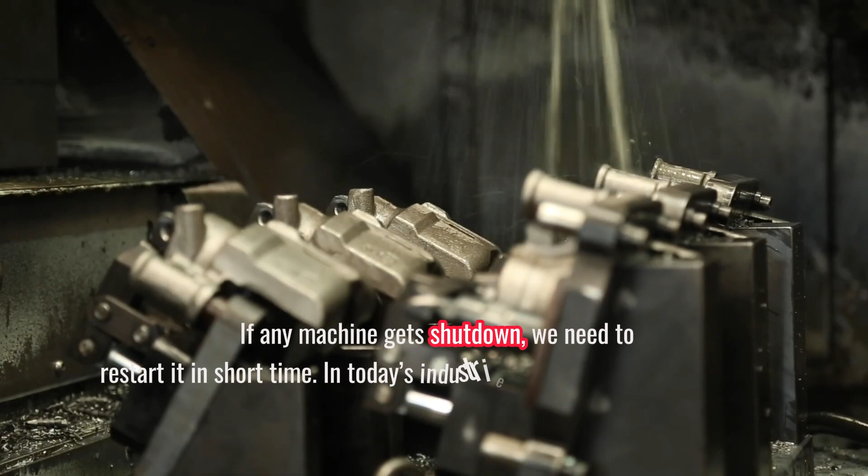Being an engineer or technician, our major role in industry is to keep the system running without fail. If any machine gets shut down, we need to restart it in a short time. In today's industries, where production rates and product demand are very high, machines should not get shut down. If it is shut down, then it should be restarted very fast.

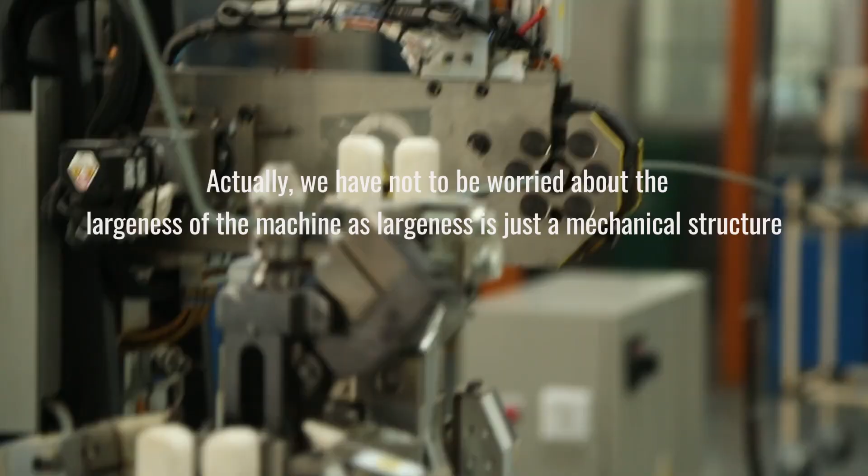Now our first problem is where to start finding the problem in a machine which is very large in size and spread over a large area. Actually, we need not worry about the largeness of the machine, as largeness is just a mechanical structure. Often, we don't get any problem in the structure once the machine's running trial is checked off. So we have to concentrate on three parts, i.e. input, controller, output. These three parts of the machine are the important parts in terms of finding problems.

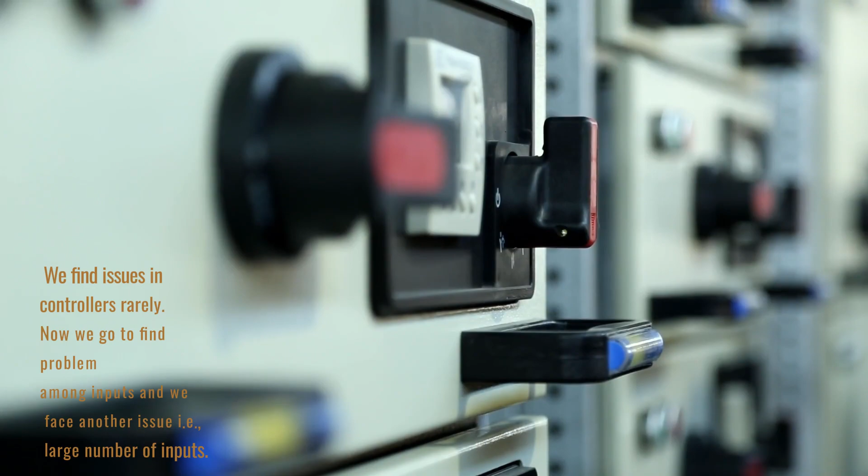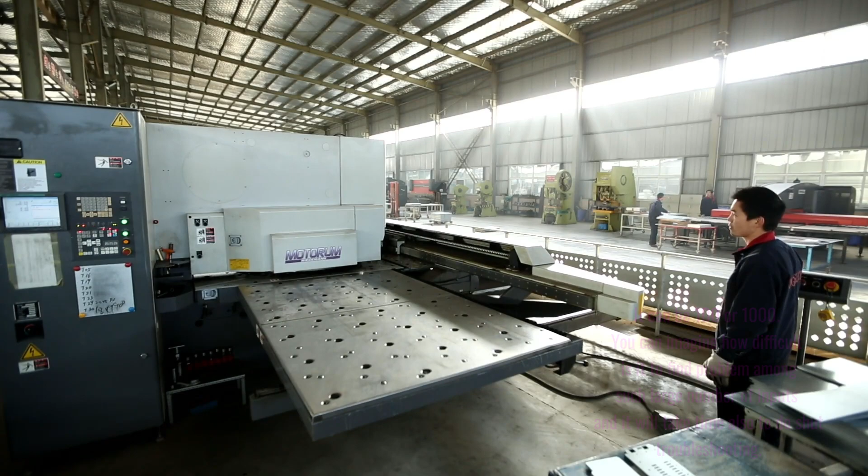Most of the time, machines are shut down because of input and output issues. We find issues in controllers rarely. Now we go to find the problem in inputs, and we face another issue, i.e. a large number of inputs. It can be 100 or 1000. You can imagine how difficult it is to find a problem among such a large number of inputs, and it will take time to do troubleshooting. The same problem we face among outputs. If we have an advanced controller with advanced featured software, we can find the problem in 5 to 10 minutes. We shall have a discussion about controllers.

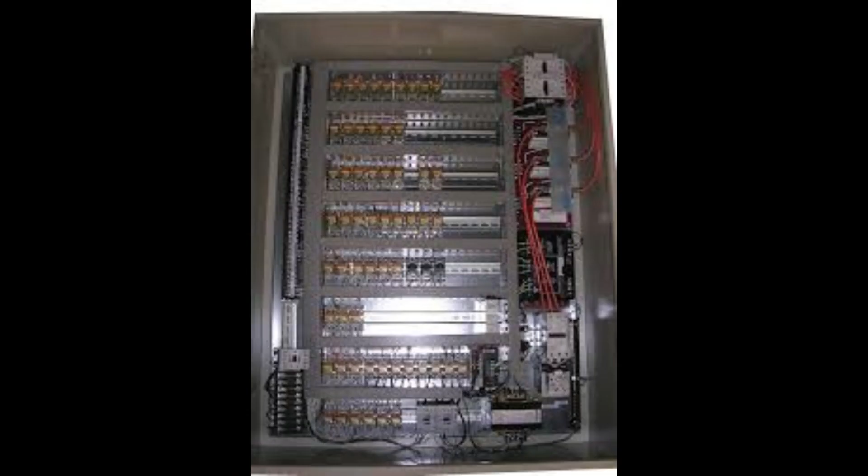A controller monitors and controls any machine system. Initially, when industry started, it was all manual operation. Manual means a man was the controller. It was a man, an operator, who used to monitor the system, and he was taking decisions of operation too. This manual system was not accurate and was very time-consuming. The very first automatic controller that came in industry was the relay logic controller.

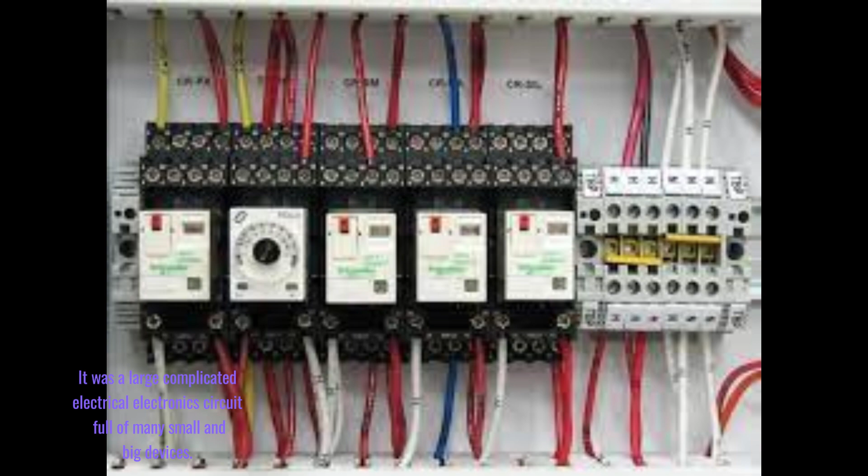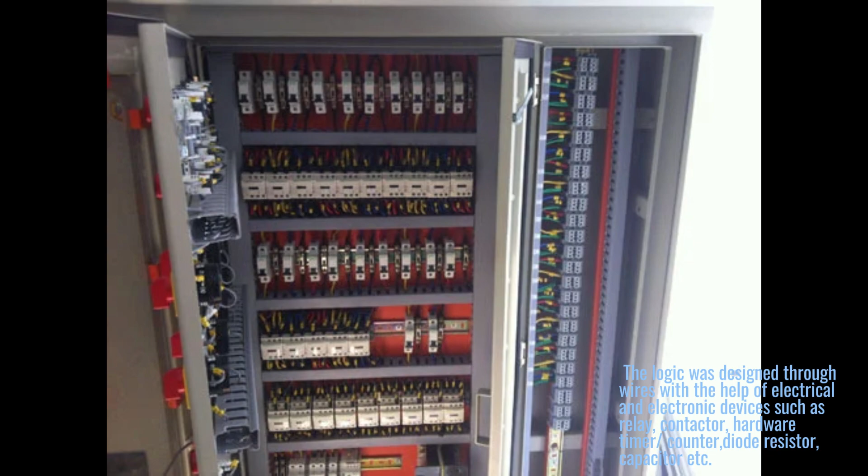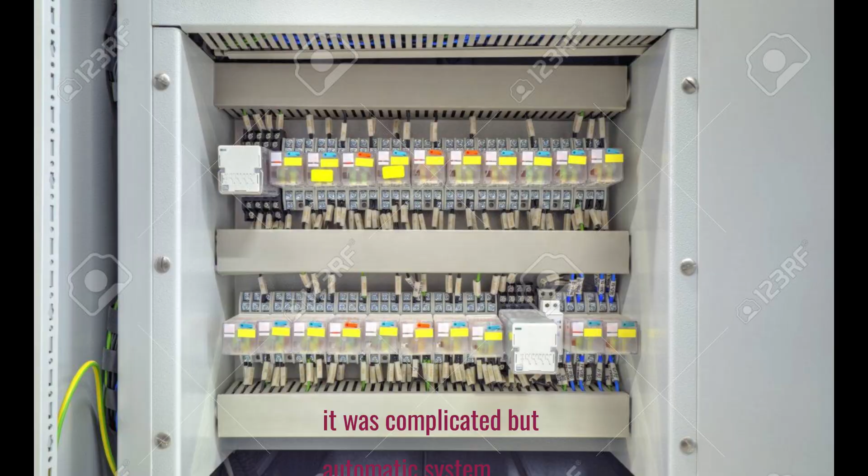It was a large complicated electronic circuit, full of many small and big devices. The logic was designed through wires with the help of electrical and electronic devices such as relay, contactor, hardware timer, counter, diode, resistor, capacitor, etc. It was complicated but an automatic system. This relay logic can be seen in some old industries. Railways also use relay logic control. Now it is being replaced with advanced controllers.

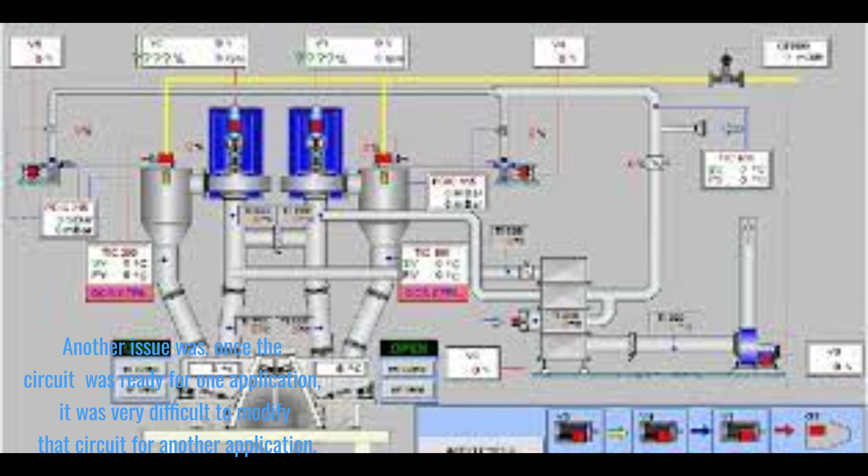It was a good controller, but obviously it has some limitations. Once it was shut down, it was so difficult to find the problem in that large complicated circuit, as there was no monitoring system at that time. Another issue was, once the circuit was ready for one application, it was very difficult to modify that circuit for another application. In fact, even small modification was difficult.

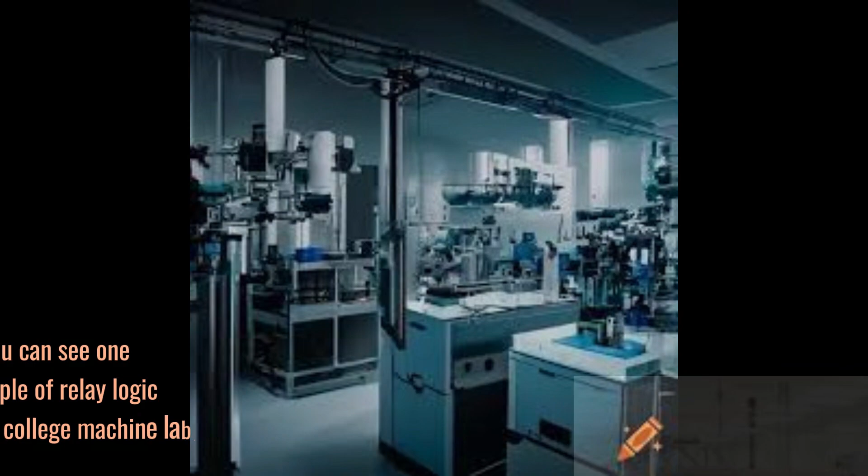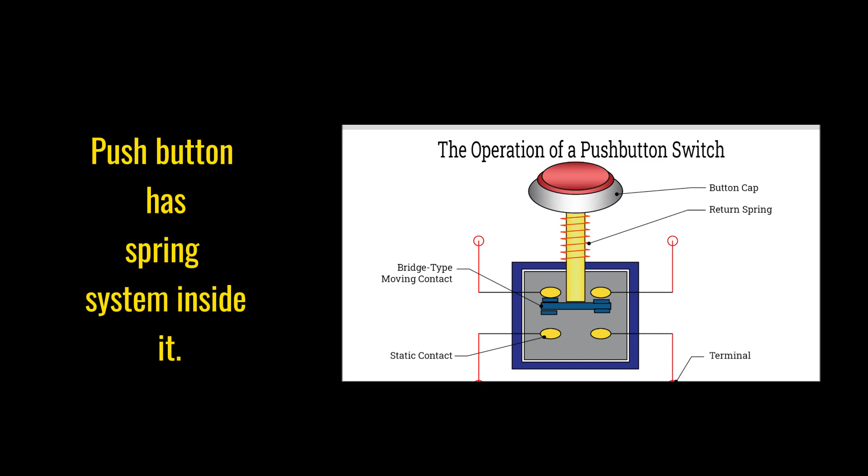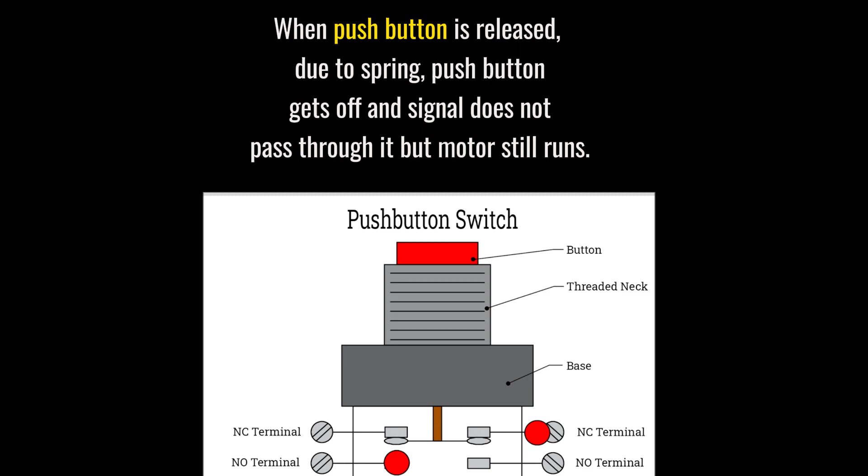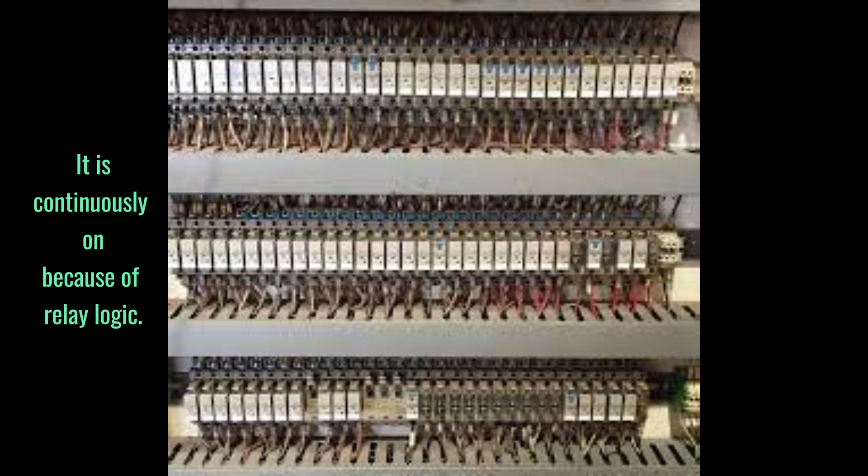You can see one example of relay logic control in the college machine lab. The motor is turned on and off by two push buttons, generally green and red colored. A push button has a spring system inside it. When the push button is pressed, it conducts and supply reaches the motor. When the push button is released, due to the spring, the push button gets off and the signal does not pass through it, but the motor still runs. How? There is no microcontroller that you can see. It is continuously on because of relay logic. The motor is latched by a relay.

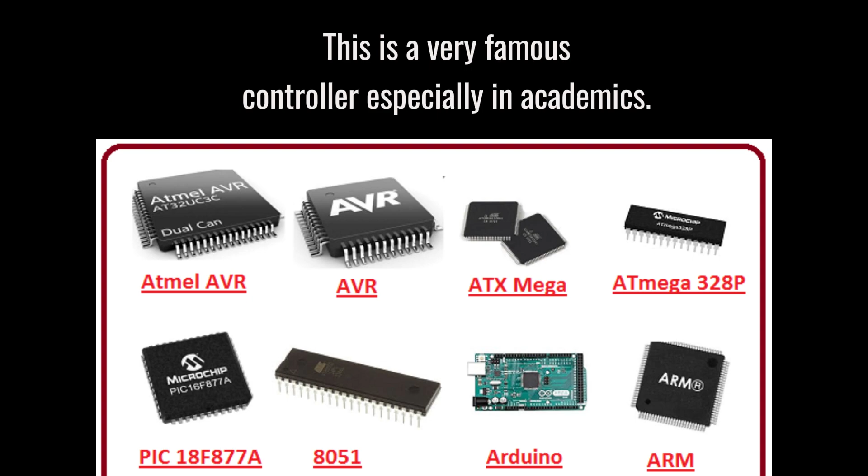Another very famous controller was the microcontroller. This is a very famous controller, especially in academics. It is a very good controller as it is very compact in size, very cheap in cost, and the best part, programmable. If you are able to program your controller, you can make modifications in your existing system as per requirement, but still it is not used in industries to control machines, and this is the reality.

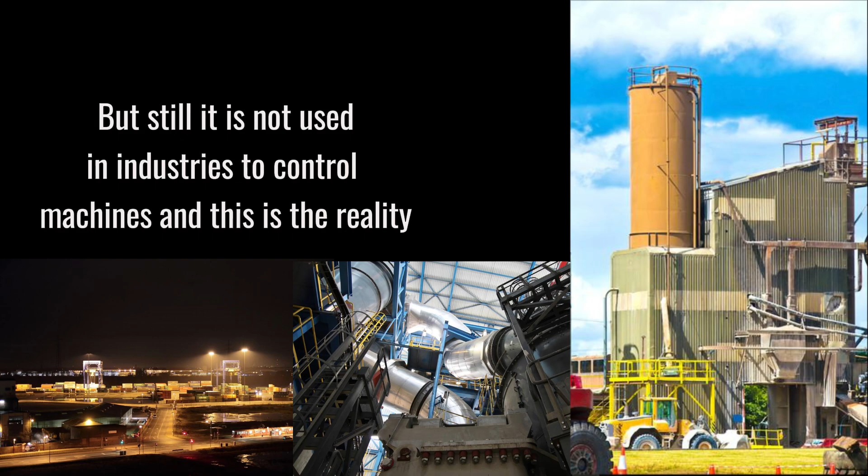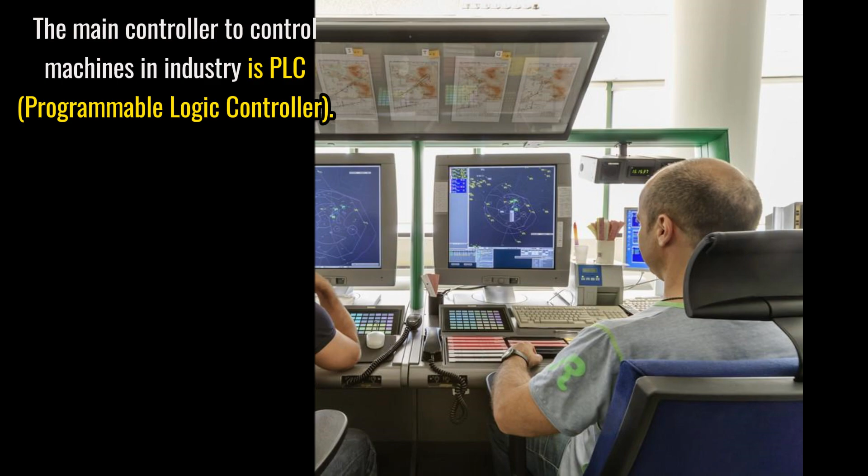The microcontroller is a very good controller, but it has some limitations, because of which it is not the main controller in manufacturing industries. The main controller to control machines in industry is the PLC, Programmable Logic Controller. It originated in 1968 in the automotive industry in the USA, on the proposal request of Hydramatic General Motors, for replacement of the relay logic control system. This proposal was written by Edward R. Clark. The selected proposal came from Bedford Associates.

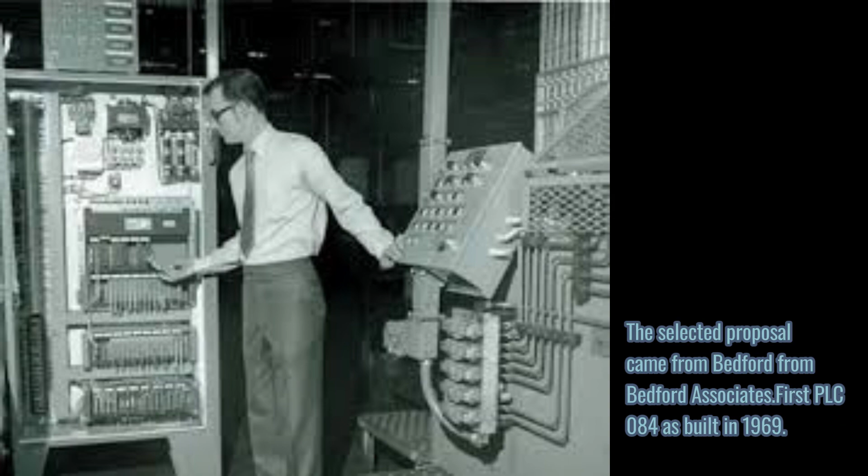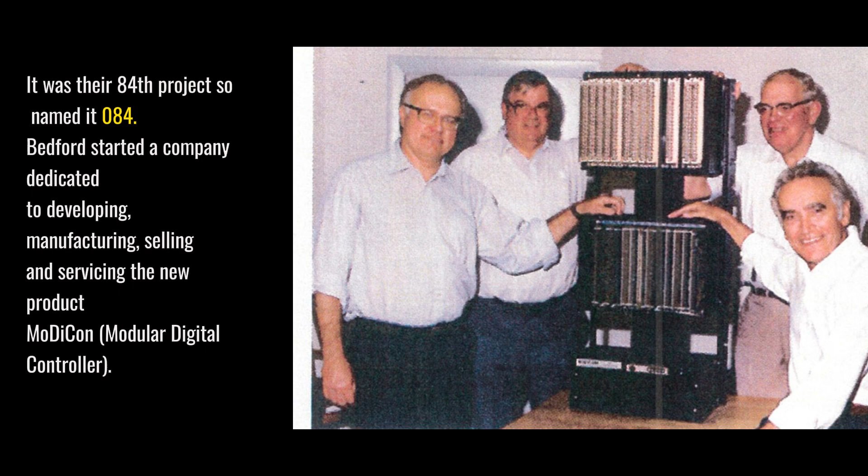The first PLC, 084, was built in 1969. It was their 84th project, so they named it 084. Bedford started a company dedicated to developing, manufacturing, selling and servicing the new product, Modicon, modular digital controller. Dick Morley, one of the people who worked on the project, is considered the father of PLC. This brand Modicon was sold to Gould Electronics in 1977 and later to Schneider Electric, the current owner.

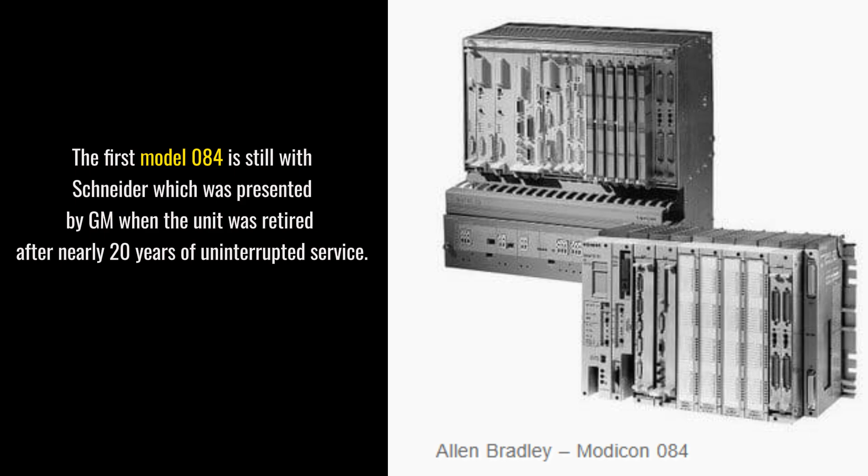The first model 084 is still with Schneider, which was presented by GM when the unit was retired after nearly 20 years of uninterrupted service. Modicon used the 84 moniker at the end of its product range until the 984 made its appearance. In a parallel development, Odo Josef Struger is sometimes known as the father of PLC. He was involved in the invention of the Allen-Bradley PLC. During 1958 to 1960, he invented the PLC acronym.

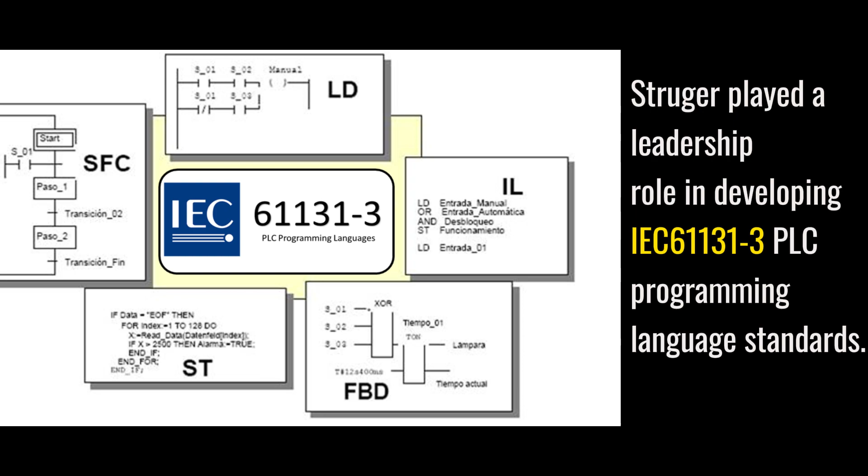Allen Bradley is now owned by Rockwell Automation. Struger played a leadership role in developing IEC 61131-3 PLC programming language standards. In general, a PLC is an electronic digital device which takes input and generates output as per the logic developed.

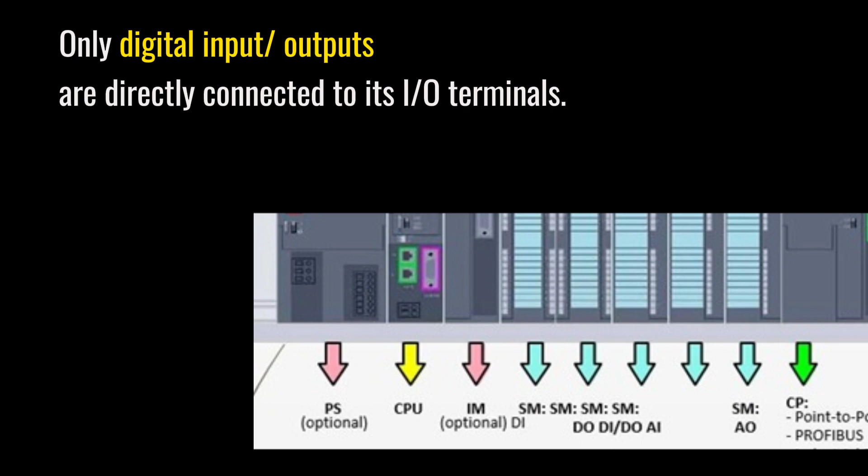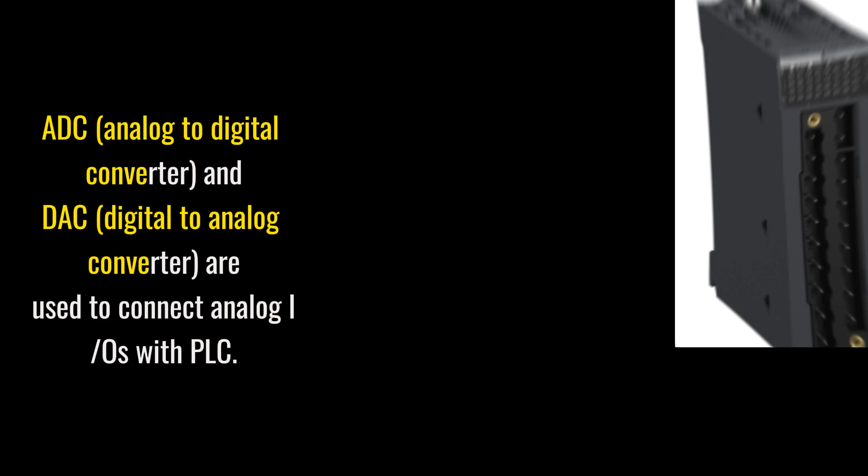It is a digital device. Only digital inputs and outputs are directly connected to its I/O terminals. Analog I/Os are not connected to the PLC directly. An ADC, analog to digital converter, and a DAC, digital to analog converter, are always used to connect analog I/Os with the PLC.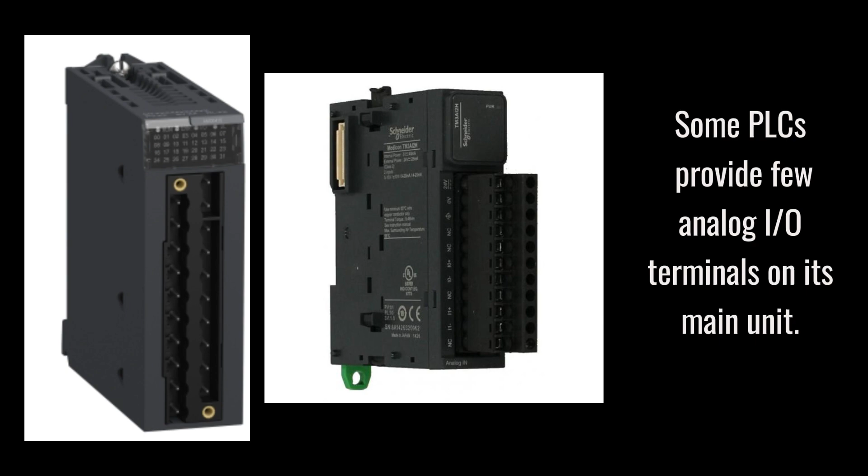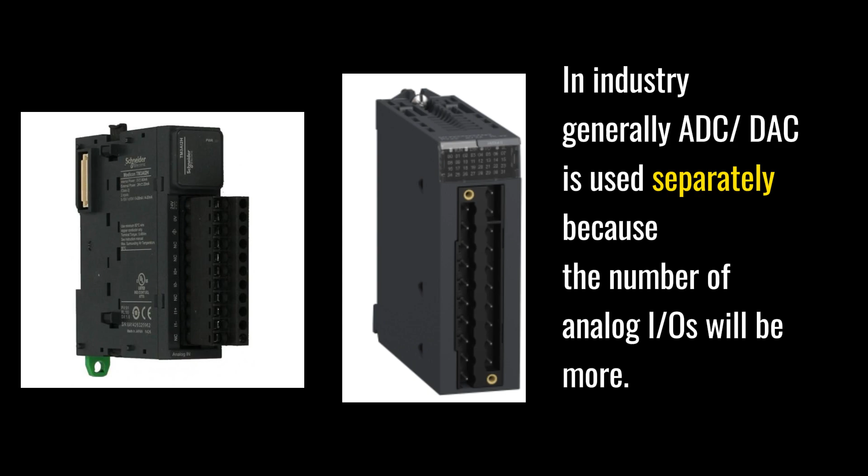Some PLCs provide a few analog I/O terminals on the main unit. In that case, the ADC and DAC are placed inside the main module. In industry, generally the ADC and DAC are used separately because the number of analog I/Os will be more.

PLC is used to control machines in any kind of manufacturing industry, such as automobile industries, cement plants, power plants, oil and gas plants, food processing industries, chemical plants, pharmaceutical industries, printing and packaging industries, etc.

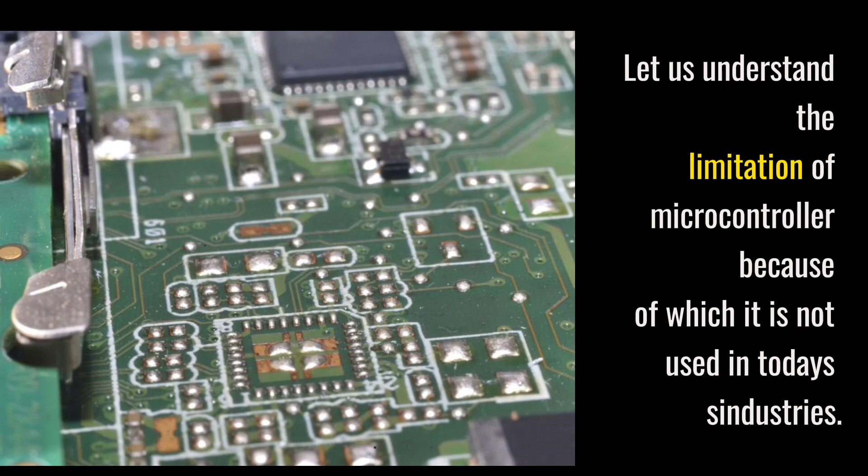Before we discuss the limitations of the microcontroller, let me clarify that advanced controllers also work on the working principle of the microcontroller. Advanced features of the advanced controller were not added to the microcontroller, but a new controller was introduced to sell at higher cost. Let us understand the limitations of the microcontroller, because of which it is not used in today's industries.

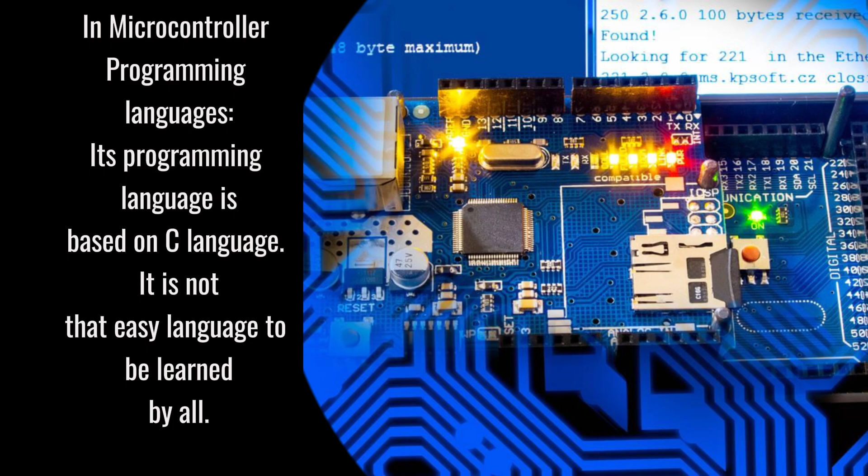In microcontroller programming, the programming language is based on C language. It is not that easy a language to be learned by all, while PLC has 6 programming languages. The user can select a language as per comfort. Ladder diagram is the easiest language. It can be understood very easily by most learners. Ladder diagram is preferred by industries because troubleshooting is very easy in it.

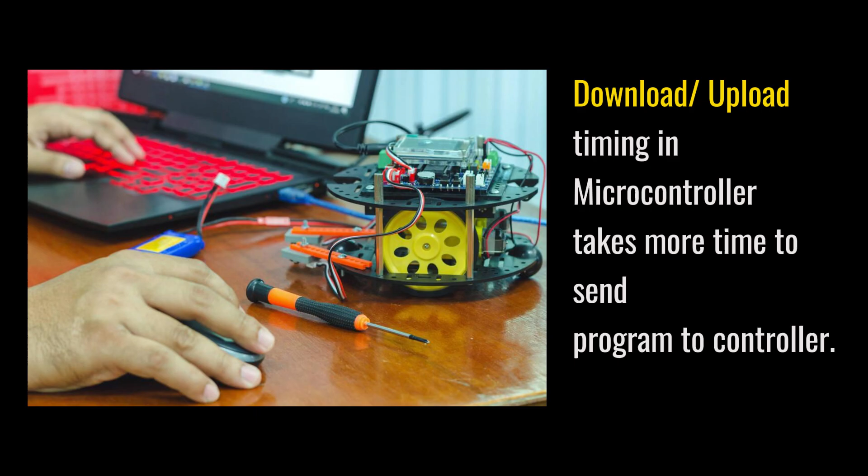Download and upload timing: a microcontroller takes more time to send a program to the controller, while a PLC takes a fraction of a second or a few seconds. In terms of program receive option, the microcontroller has no program receive option. If you don't have the program backup file, then you can't get the program back from the controller. You will have to rewrite that logic again without receiving the existing program of the controller.

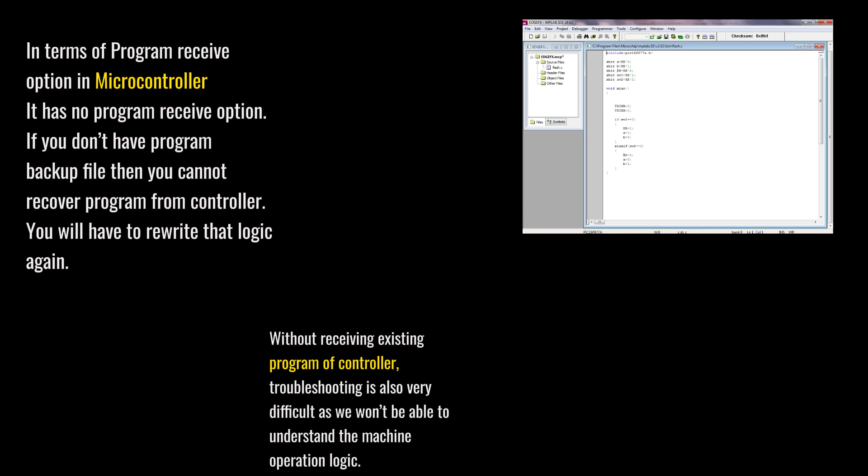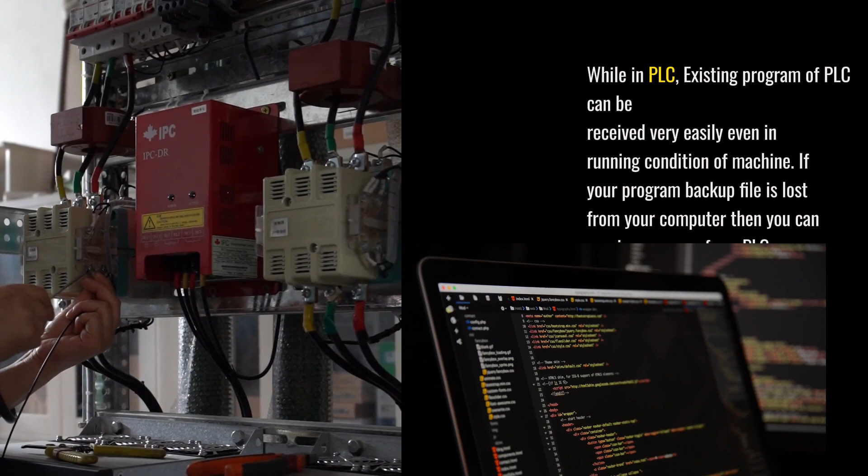Troubleshooting is also very difficult, as we won't be able to understand the machine operation logic, while in PLC, the existing program can be received very easily even in running condition of the machine. If your program backup file is lost from your computer, then you can receive the program from the PLC.

In terms of monitor or online mode, the microcontroller software has no good monitor mode to check the running status of the machine. Its monitor mode is not that helpful in troubleshooting machines. PLC has a good monitor mode in its software, which helps a lot in troubleshooting machines. If any problem occurs in a machine, we follow a few steps to reach the exact issue.

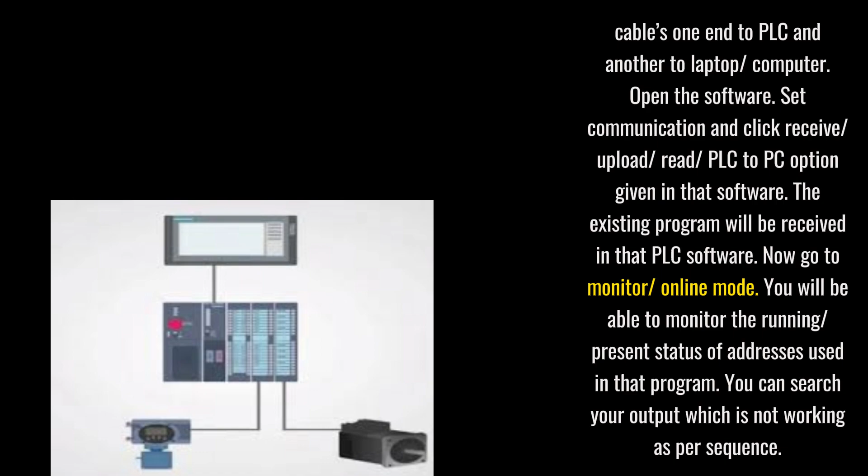Take a laptop or computer which has that PLC software installed. Connect the PLC communication cable, one end to the PLC and the other to the laptop or computer. Open the software, set communication and click the receive, upload, read, or PLC to PC option given in that software. The existing program will be received in that PLC software. Now go to monitor or online mode.

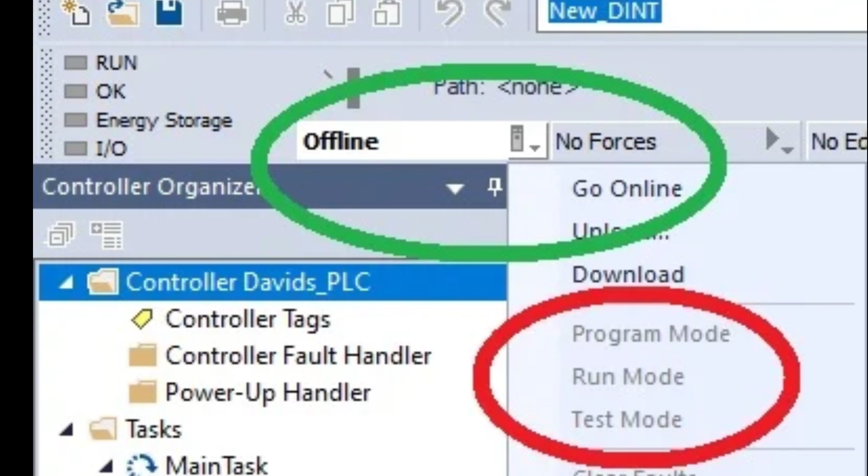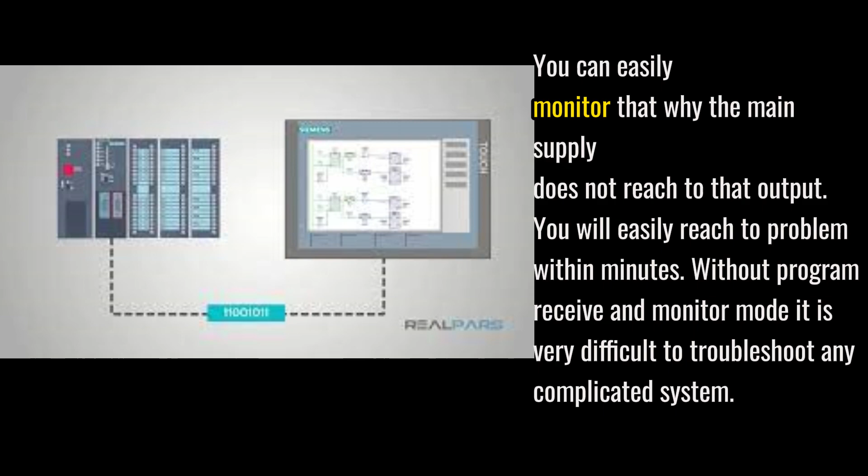You will be able to monitor the present running status of addresses set in that program. You can search out outputs which are not working as per sequence. You can easily monitor why the main supply does not reach that output. You will easily reach the problem within minutes. Without program receive and monitor mode, it's very difficult to troubleshoot any complicated system.

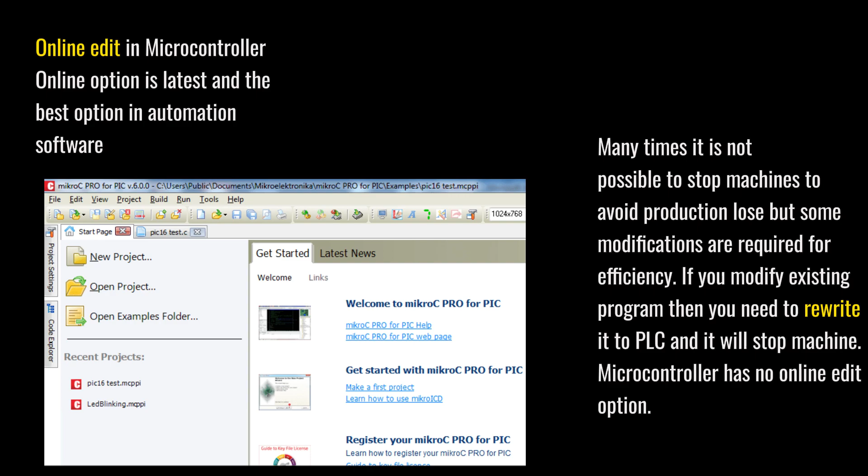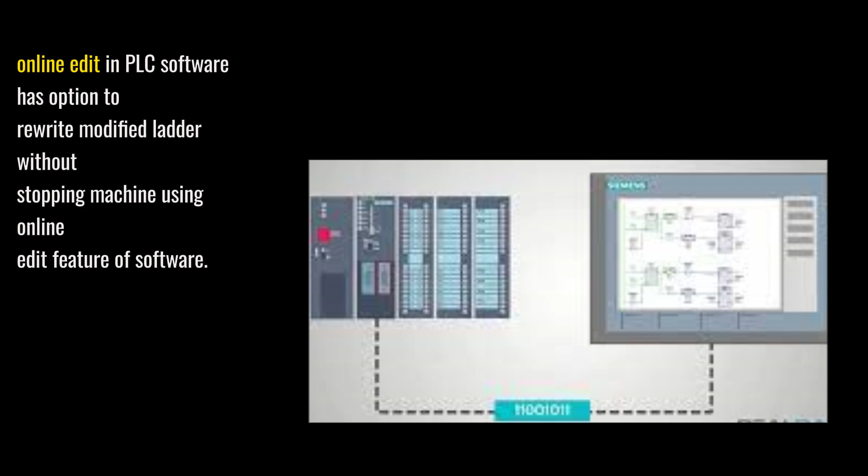Online edit in microcontroller. Online edit is the latest and best option in automation software. Many times, it is not possible to stop machines, to avoid production loss, but some modifications are required for efficiency. If you modify the existing program, then you need to rewrite it to the PLC and it will stop the machine. Microcontroller has no online edit option. Now PLC software has the option to rewrite the modified ladder without stopping the machine, using the online edit feature of the software.

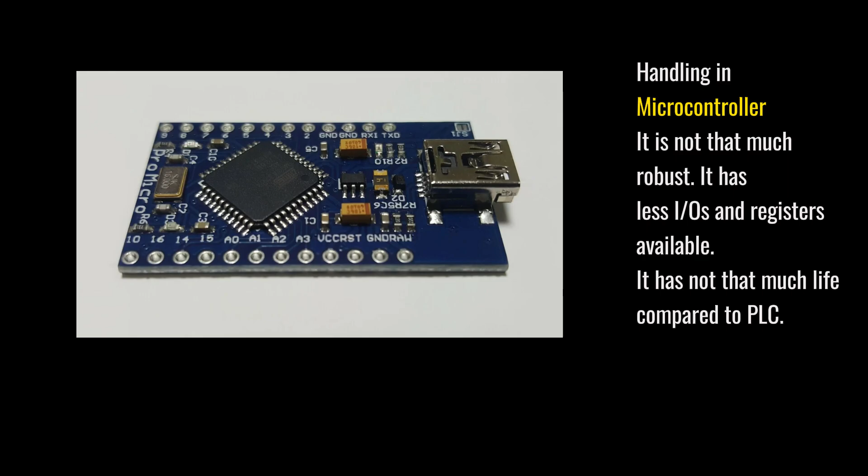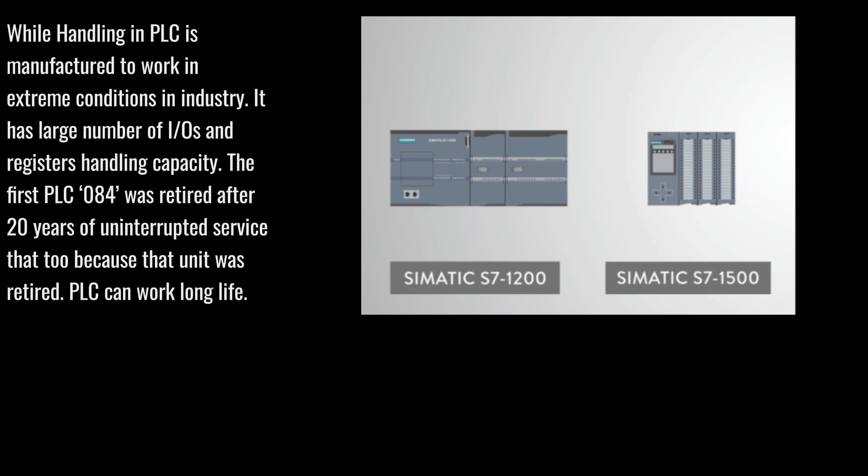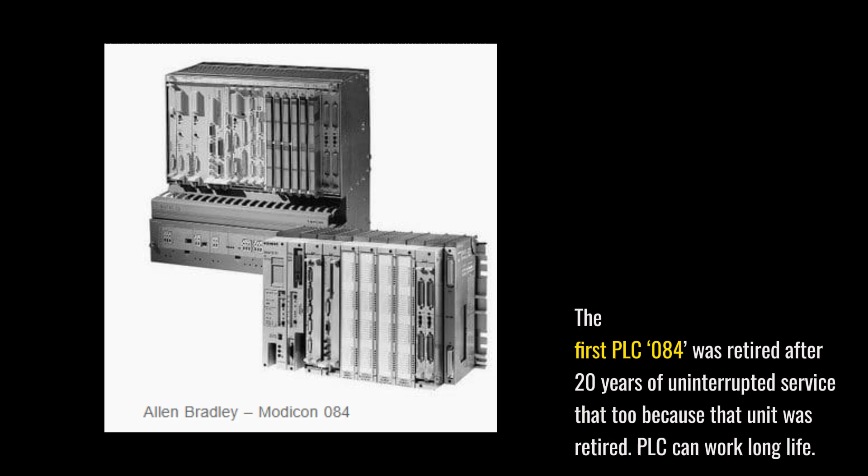Handling in microcontroller: it is not that robust. It has fewer I/Os and registers available. It does not have as long a life compared to PLC. While in handling, the PLC is manufactured to work in extreme conditions in industry, and it has a large number of I/Os and register handling capacity. The first PLC, the 084, was retired after 20 years of uninterrupted service, and only because that unit was retired. PLC can work a long life.

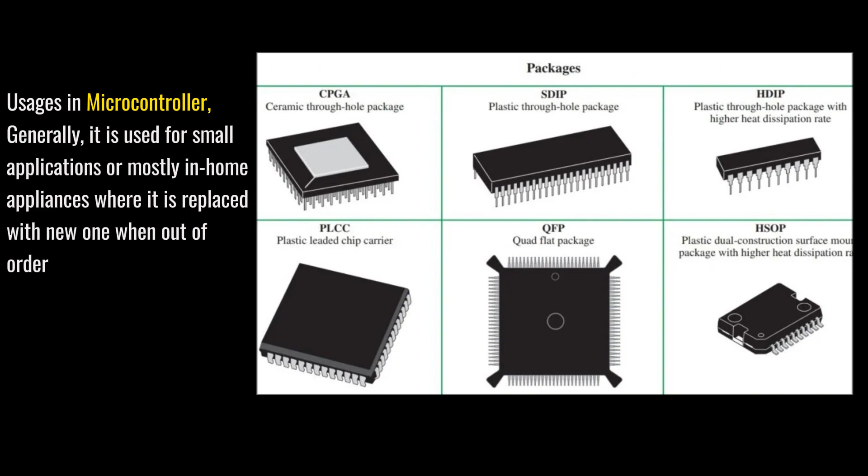Usage in microcontroller: generally, it is used for small applications or mostly in home appliances, where it is replaced with a new one when out of order. While PLC is used to control small to big machines in industries with a large number of logic sequences. And that concludes our introduction to controllers, covering the history of PLCs and the differences between PLCs and microcontrollers.